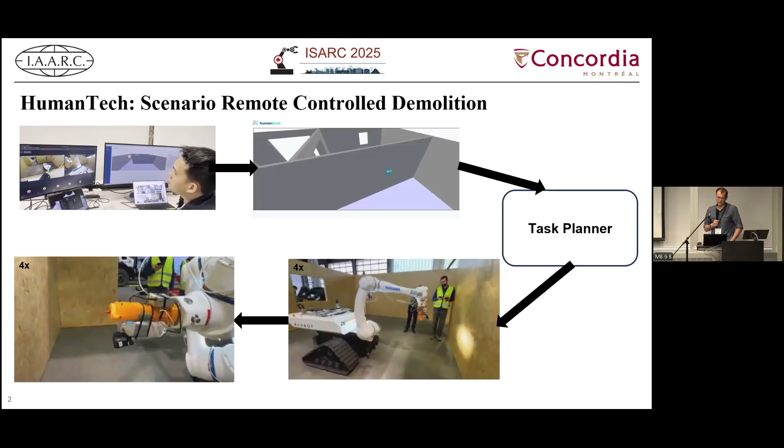What's the idea? We worked in a EU-funded project named HumanTech, and the idea was to have a remote controlled demolition scenario. The whole scenario looks like this. We had associated partners from Kajima, who had a BIM model, where we were selecting an area which should theoretically be demolished, like a square which should be cut out of a wall.

When this information got into a task planner, it created a navigation task where a robot should drive, and in our case, a marking task, because we were not able to put a chainsaw on the robot, so we tried to mark the positions which the person selected in the BIM model.

What I'm going to present here is the lower part, so the navigation approach and the marking approach we did. The whole idea behind it was we wanted to utilize the information we have from the BIM model for both our localization within the building and for the navigation.

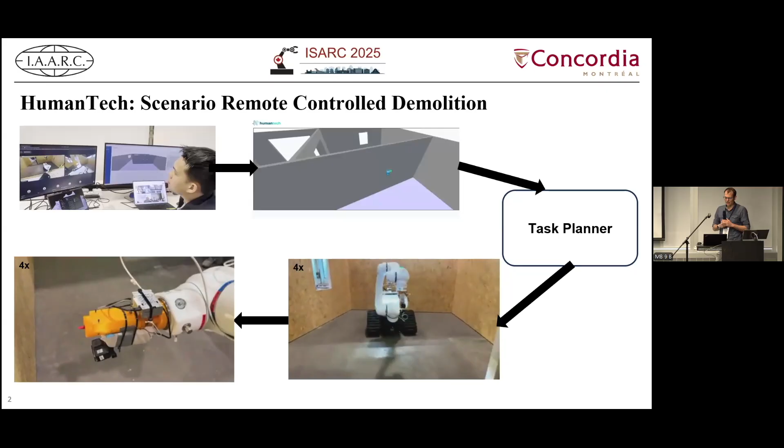Let's start with our scenario. We built a building with 3 rooms, roughly 100 square meters in size. We had 3 rooms with relatively large openings because the robot was quite big and had to be able to drive through those openings.

The civil engineers we worked together with created an IFC file of that environment, and we also imported it to Unreal Engine. Since we only had roughly 3 months with a robot, we started to develop our algorithms within the simulation and later on brought them to the real robot.

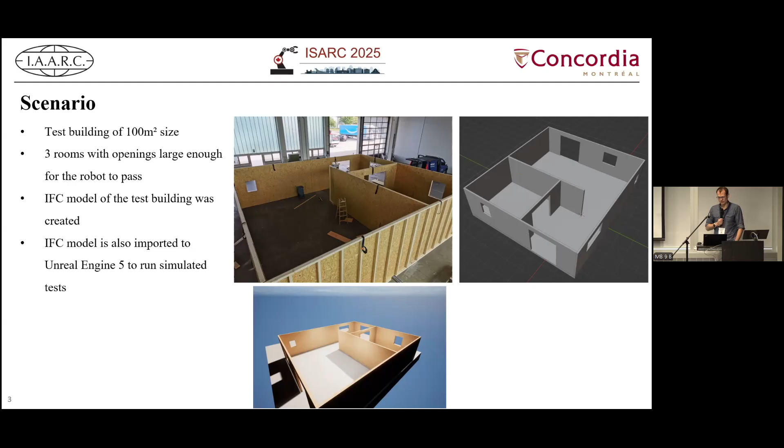This is our hardware setup. We had a robot which was built by the company Baubot. It is a differentially steered robot platform, and it was equipped with a YASKAWA arm.

Since we didn't get any feedback from the robot arm, we had the marking tool in the front where you could put a pen inside. If the pen is pushed into the tool, meaning it has contact with the wall, there was a sensor detecting that the pen is pushed into the tool. When we got that message, we knew we finished the marking and could drive back from the wall.

Our whole navigation and localization approach is based on an Ouster OS0, which is a 360-degree LiDAR scanner. As computing unit, we had an Intel NUC.

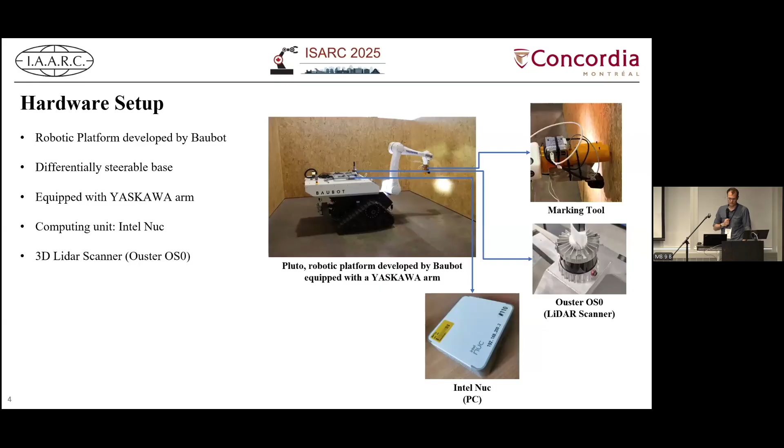Now I give an overview about our 2 main contributions, which are the localization and the navigation approach. For the localization, we had 2 workflows. Before going to the environment, we had the IFC model, and we extracted a 2D representation of that IFC model at a specific height.

For later on in the environment, we had a LiDAR scanner. We used mainly point cloud library to extract the corners of our rooms and the normals of the walls, and then we created a 2D representation of our real environment. When we matched those 2 representations, we used them to calculate the difference between our measured environment and the IFC model.

One important thing to mention here is we had to know in which room we are. So we initially told the robot in which room we are starting, and while driving, we tracked which is our current room, so we always knew to which room we had to compare. Theoretically, that might also be possible without that prior knowledge.

But that wake-up problem is a whole different topic. Let's say you are in a complete building and want to detect in which room you are. There's literature about it, and that was too much work for us to perform in this scope here.

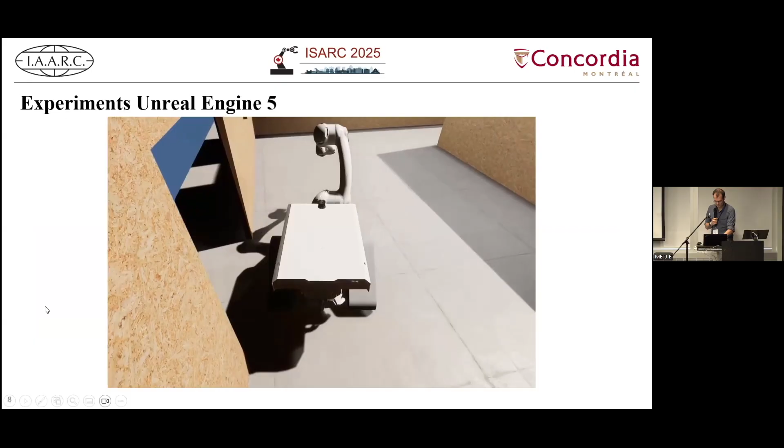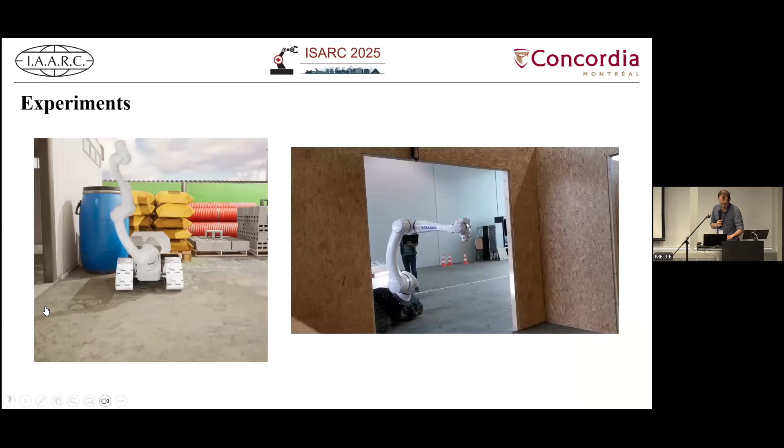Now about our experiments. Sound. Yeah. Can I mute it? Okay, then I will do it anyways.

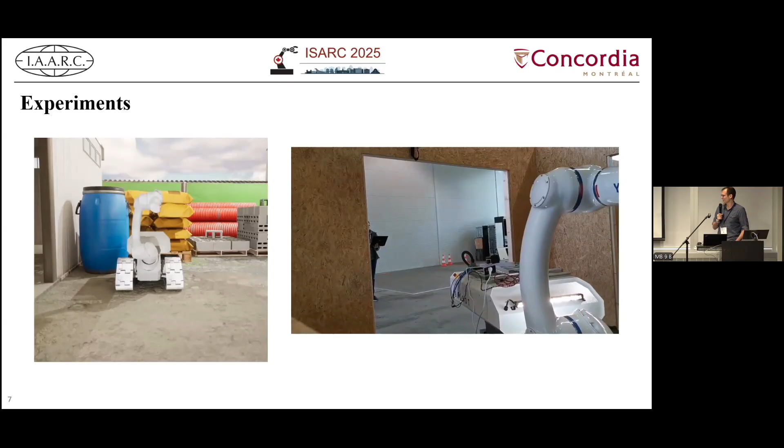So we had two kinds of experiments. One was in a simulated environment, which is here shown on the left. The other one is the real robot, which is doing some noise at the moment. So first about the simulated experiments.

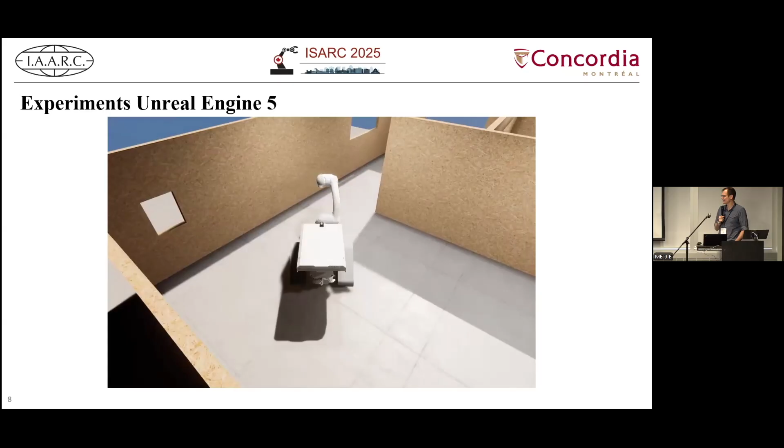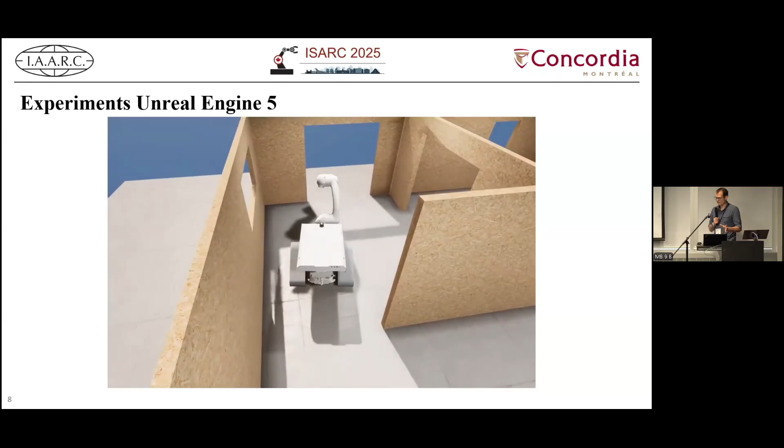This one here shows some of the first tests we did with the elastic band fusion algorithm. Here we had some problems with the bubbles which are created because sometimes they were really close, and we had a really simple navigation approach, which is just rotating to the next bubble and then driving forward while correcting a bit if it's off of the target point. And here we had the issue that the robot was strangely rotating between the points because we had too many of those bubble points.

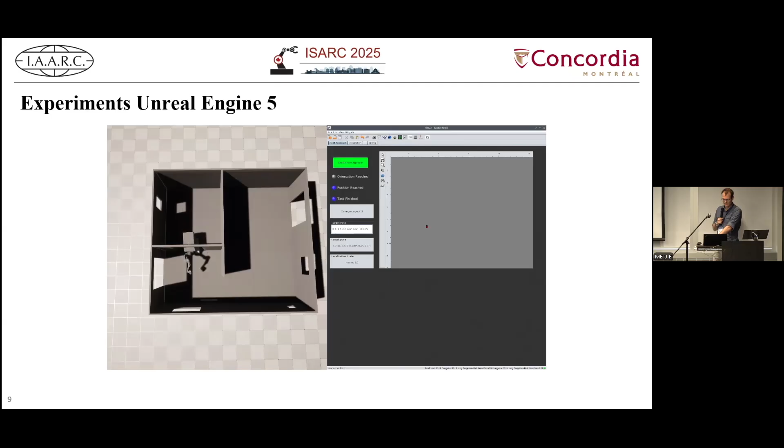So later on in the real experiments, we forced to have fixed bubbles within the rooms, and we massively reduced the number of bubbles we had for our algorithm. Maybe we'll skip this and continue with a real experiment. So this is how it looked in the end. This is 4 times the actual speed. We had always 1 or 2 points within each room, and we had fixed points in the doorways between the rooms.

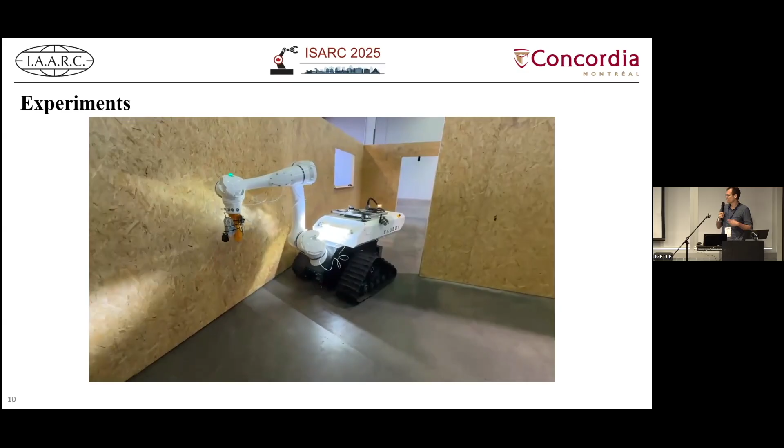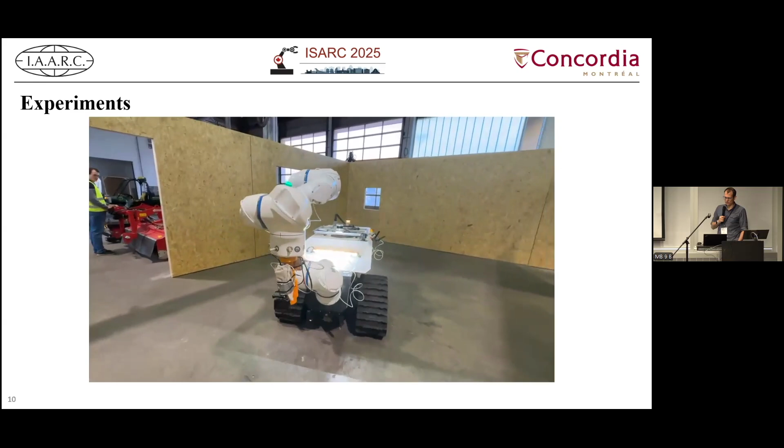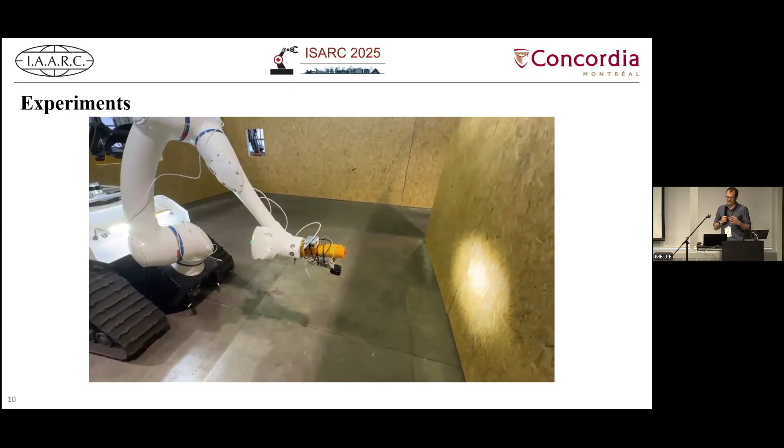So here the robot is completely autonomously navigating until it reaches its target position, and then we switch to the arm control and we calculate the local position for the arm where it should drive, then it moves slowly towards the wall. Our main issue here is, since we don't really use any vision sensors for the arm, we had to have quite a big safety distance, and we are slowly moving towards the wall until we get the contact signal of our marking tool. So it took quite long from moving in front of the wall until we were able to mark the position.

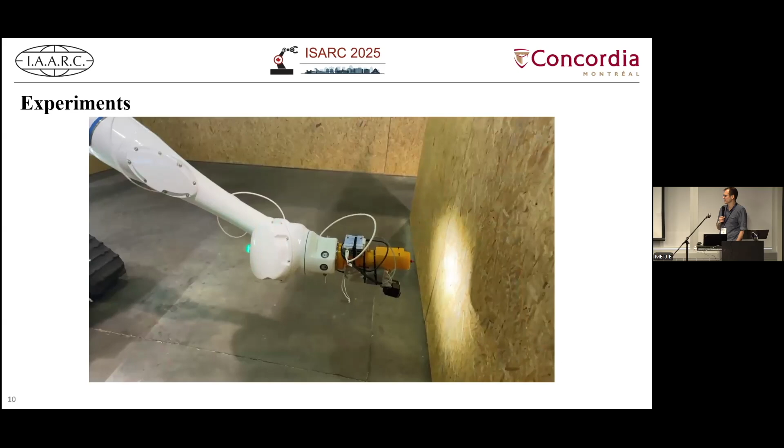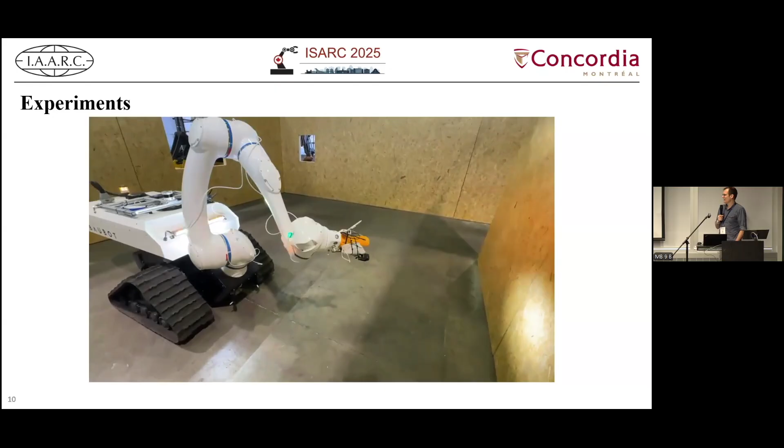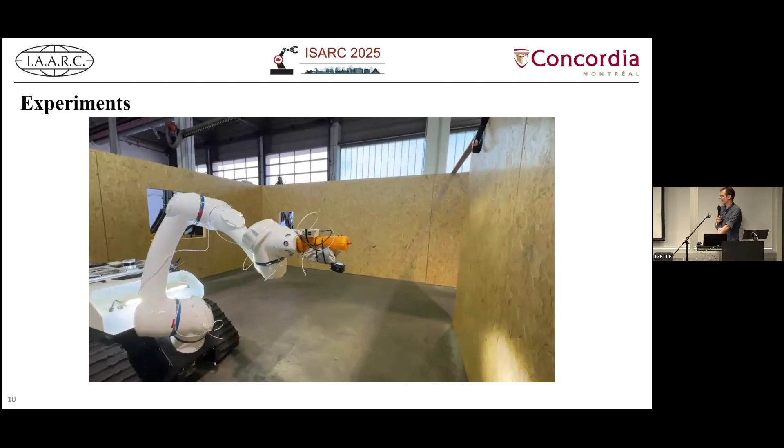And in a second you can see now we have the contact to the wall, and then the arm is moving back to the position where it started to mark and continues with the next position. And then that's the second position, and then it would continue to drive again and mark the other 2 points of the square which was selected.

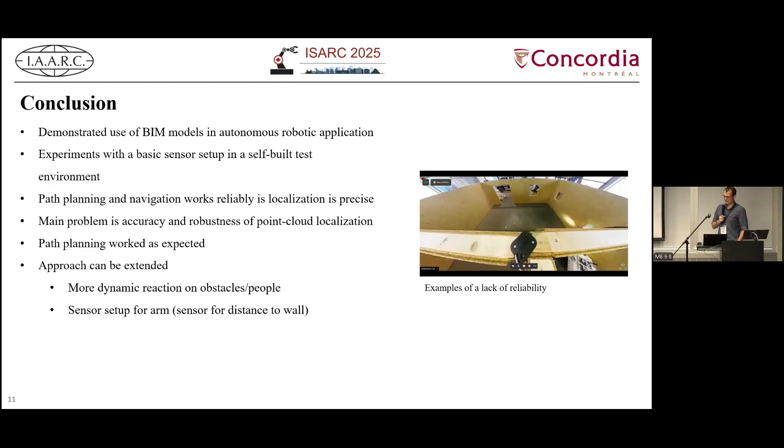Now to conclude, we demonstrated how to use typical robotic applications utilizing the information we get from BIM models. We used quite simple sensor setups, so only a LiDAR sensor and the inertial measurements from the robot. We utilized the BIM models for the planning algorithm and for the localization. For the planning and navigation, it worked really well. The localization was quite inaccurate in some cases.

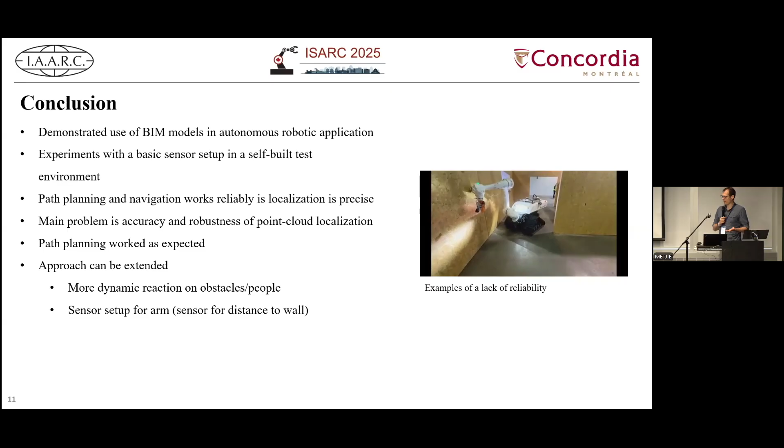So sometimes we didn't manage to get a decent localization, especially within the big room, which causes problems when placing in front of a wall, and also leads to a quite bad position, which was sometimes off by 5 to 10 centimeters. In the worst cases, it was almost 50 centimeters off of the actual target we had.

Here on the right, you see some failed tries where we had one big issue in the corner here, so we were sometimes hitting the wall, sometimes we had to stop it here. That's also an issue of inaccurate positioning, because we couldn't see in front with the LiDAR scanner because the arm was in the way. So we were not always able to successfully drive through the building.